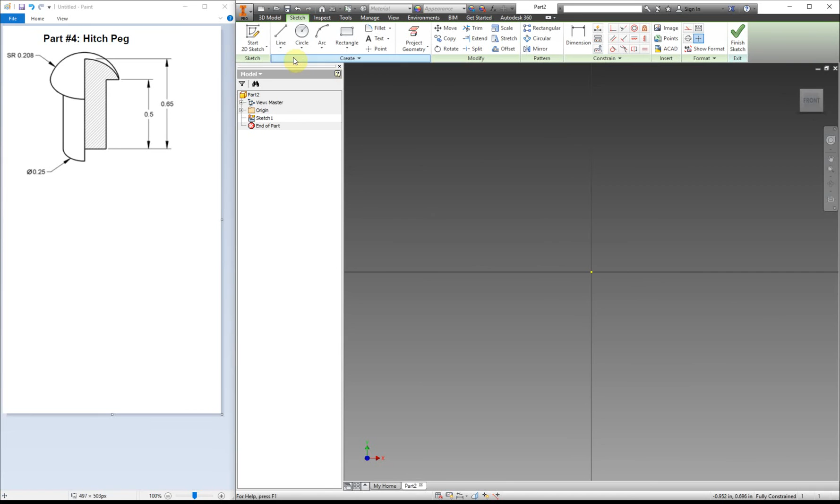And we can start by creating a center line. So if you can click on line, then make sure you select the center line. Click on our origin and make sure your line is going straight up at 90 degrees. And our distance for this, we can see from our sketch over here, is 0.65.

Now I want to click OK, and we want to make sure that the center line is not selected anymore. The reason for this is we just want to place in lines right now, so you can place one here, here, and here. The dimensions right now don't need to be exact because we're going to add in our dimensions now.

So I'm going to click on that corner and then I'm going to click on the center line. For this one, the reason why it's coming up with a diameter is because you clicked on the line and a center line, so it's assuming that you're going to revolve. So our dimension for this one, if we look at our sketch, is 1/4 inch.

And our height for this line right here, I'm going to move it this way just because we're going to have some problems selecting that line if I don't. This one is 1/2 inch.

And now we want to put in an arc. So for this one, I'm going to do the arc with a center point on it because I want to make sure that the center point is connected to this line.

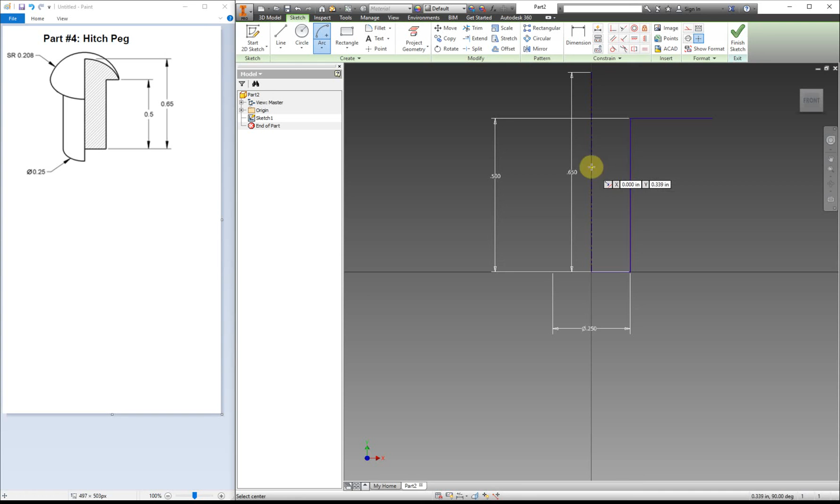Don't connect it to this green dot right here. It'll make it so you can't actually change the dimension. You want to be above that green dot, and you want to make sure you have a green dot here to select.

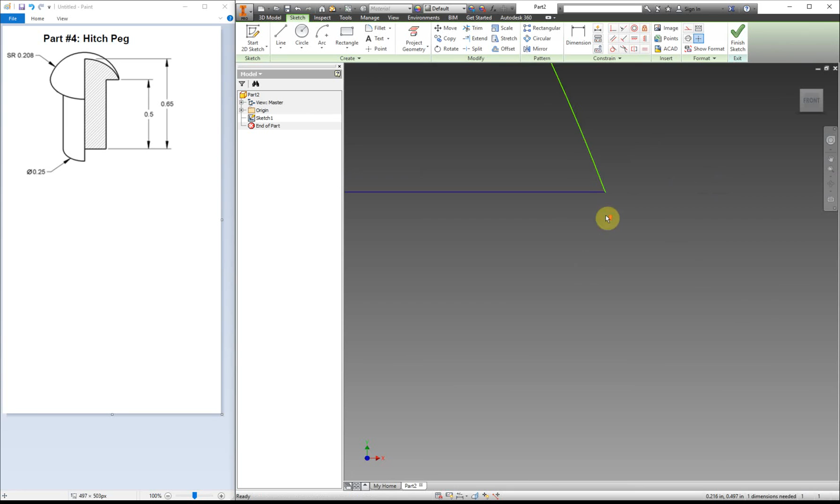Having issues selecting it. So if we look in here, we can see that it went over a little bit, but these two things we can just quickly trim up because we don't need the extra parts of either of those lines. So we're going to make sure it lines up nicely there. So make sure you zoom in and check that.

The next thing is we're going to add in a dimension right here for our spherical radius. So that's what the S is - spherical radius instead of just radius that you're used to seeing. So we can change our number to, let's see, 0.208. Alright, that changed this just a little bit.

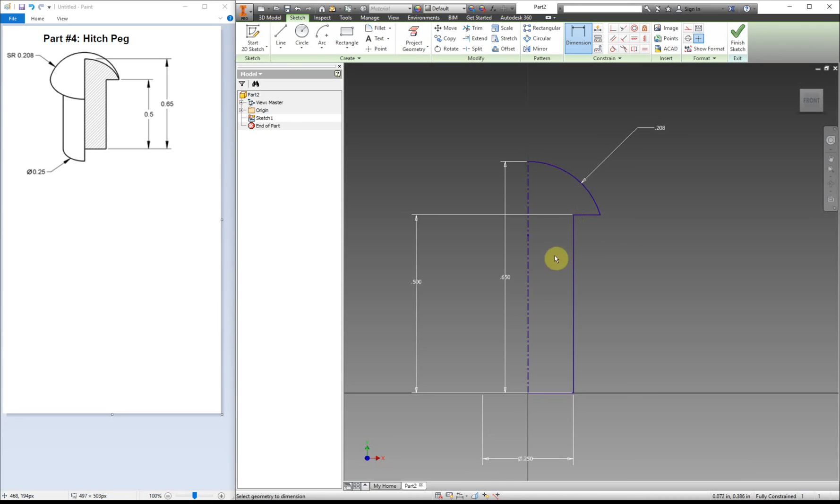Now we can finish our sketch. Click on Revolve. Automatically selects everything that you need to select. If you did not change that line in the middle to a center line, then you're going to have to select possibly your profile, maybe the axis. The axis is the center line that I already pre-selected, and then click OK.

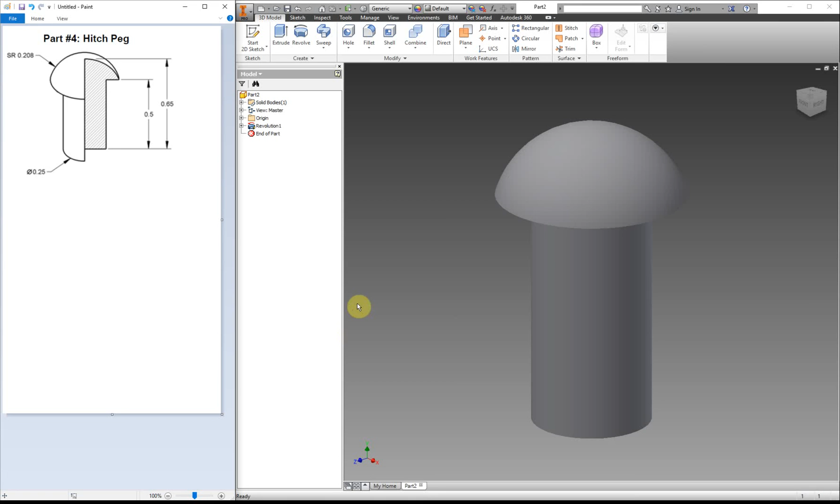And that right there is your hitch peg. It's all set. The nice thing about this part is it's pretty quick to make, and also using the exact same directions but using different dimensions, you can do the exact same thing and make the linkage peg.